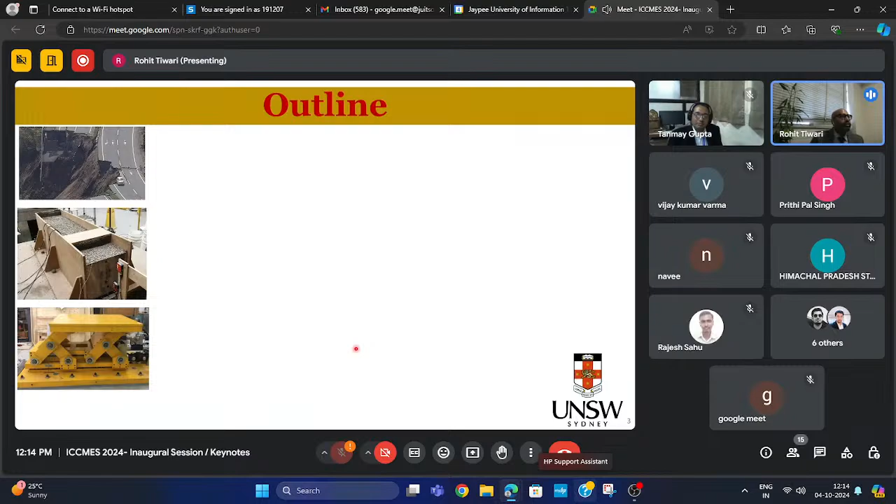So this is my outline. I will be talking a lot about geotechnical earthquake engineering, and especially earthquake loading in geotechnical structures - how the loading can be disastrous to different forms of geotechnical structures, how earthquakes act on geotechnical structures, and why the destruction or collapse of geotechnical structures happens.

Then we will move towards understanding the role of physical models in studying their behavior and comparing it with the prototype, which is actually a full scale model. So what's the importance of these physical models, and how capable are they of replicating the seismic performance or earthquake response behavior of a prototype or large scale geotechnical structure.

Then I will talk a lot about our new biaxial shaking table, which is our own design. There's a reason why I included this - to highlight how everyone can design their own equipment, and by doing this you can save almost 50 to 70% of the cost, which is really important in terms of money, and gives you an idea of your experimental setup and its capabilities rather than buying it from a commercial supplier.

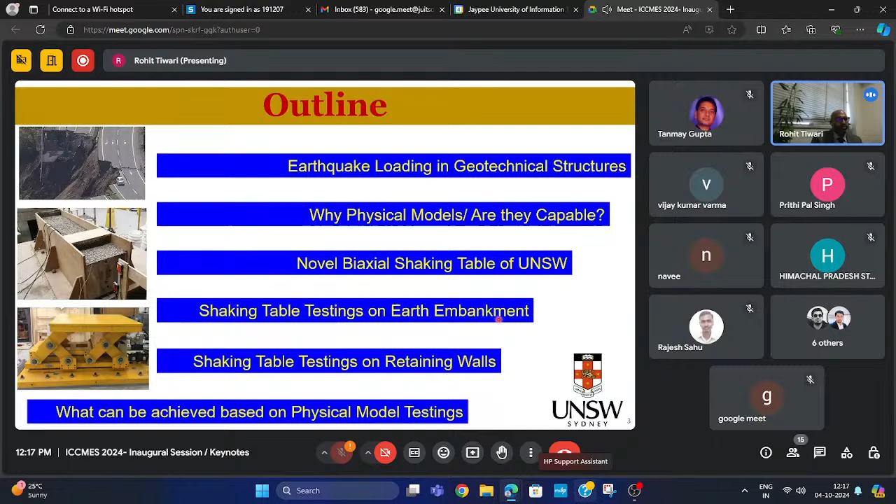I'll start by showing some interesting photographs of different retaining structures for the audience who are not very familiar with retaining structures or retaining walls. A retaining wall can look like this highway example: there's a filling, and in order to support it, you have to construct a retaining wall. So you have a stem, as in a cantilever retaining wall, or it can be a gravity retaining wall. There are different kinds of retaining walls available.

Then you fill it with a backfill. Generally it has to be a cohesionless backfill so that water is not retained inside the soil and can seep through. It also has better frictional properties, giving higher shear strength from the soil, which gives high stability to the retaining wall.

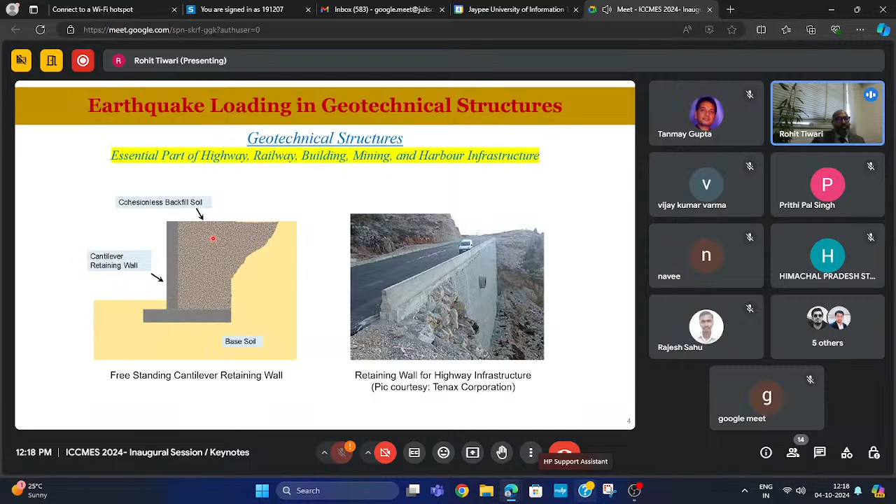Now this is another kind of retaining structure, a bridge abutment. Everyone has probably traveled over bridges — they're a major part of any modern infrastructure system. The bridge abutment is also a retaining structure, retaining the backfill behind it similar to before, but instead of just a retaining wall, it's also supporting a girder, so there will be a reaction from this side as well.

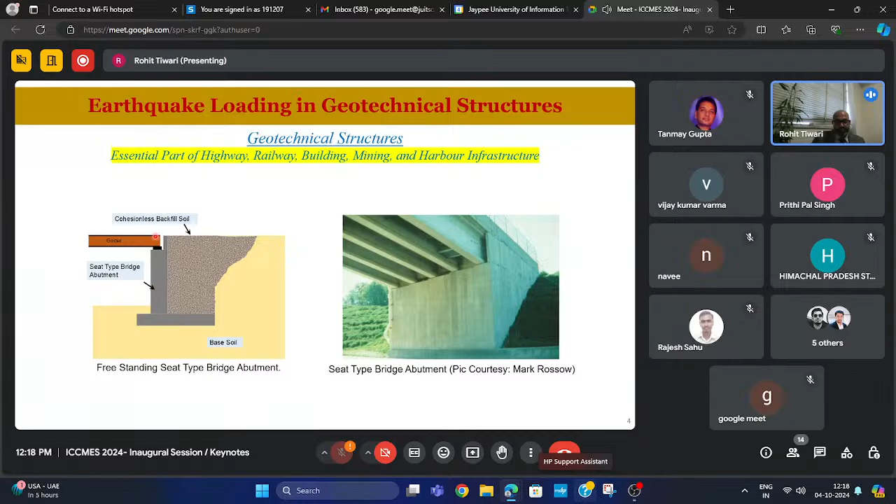This is another form of retaining structure — it can be a basement wall, a sheet pile wall supporting harbor structures, or a diaphragm wall. This is again a harbor infrastructure showing a quay wall. Because of the high water table and sand below, when constructed in a harbor medium, they are subjected to chances of liquefaction, where the ground loses almost all its strength and the soil behaves like a liquid.

In the 2001 earthquake in Bhuj, India, and in Japan, these walls were reported to get damaged because of liquefaction. Even in the Kobe earthquake in Japan, there was a report of damage to this kind of wall because of liquefaction.

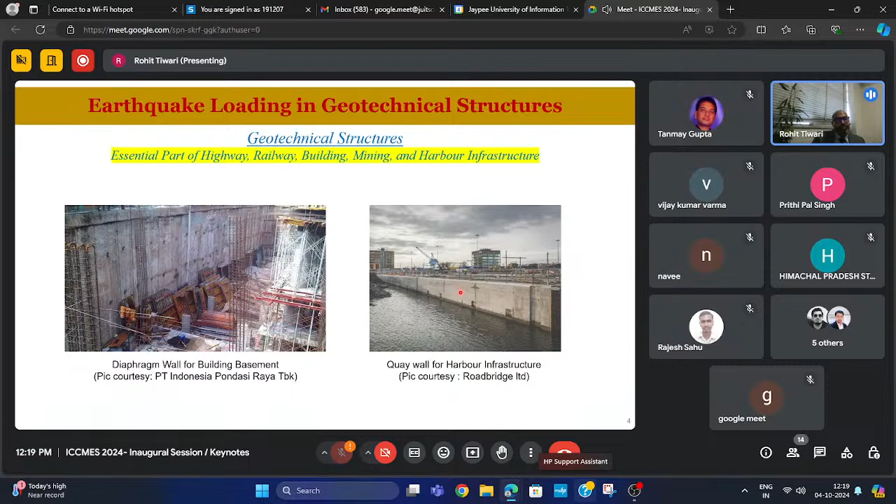This is another kind of retaining structure where you have a traditional retaining wall, but because of the low bearing capacity of the ground below it, you need to transfer all the load to the rock below. So this one is like a rock-socketed pile, with a backfill behind it, supporting a railway line. But it could be a roadway or anything else. I'm just trying to show you different applications of retaining structures.

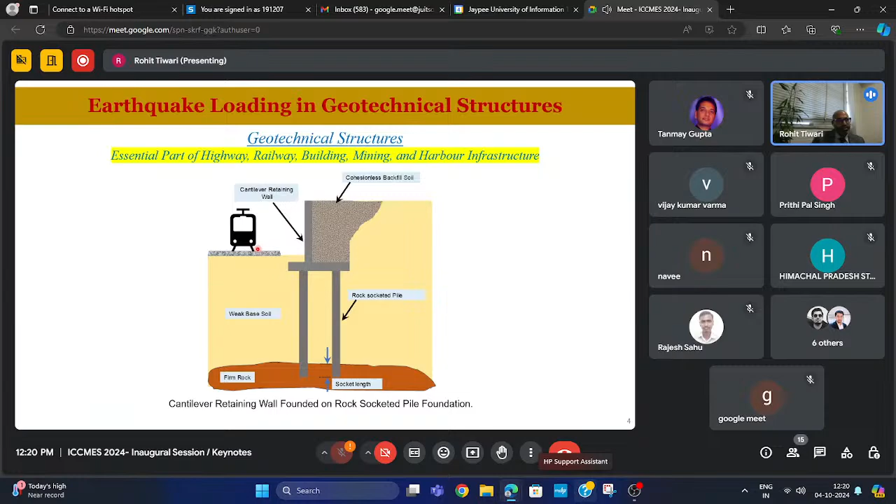I will also be talking about mining embankments or tailing dams. This is a photograph of a tailing dam. For people who are not familiar with what tailing dams are, I'll give some introduction.

When you do mining, you extract the ore from the mine — it's like rocks. You crush them, make a slurry or powder, mix it with water, and extract all the minerals — it could be gold, copper, iron — and take that mineral out. The leftover is in the form of a slurry, which you dump into a facility. We call this a tailing dam.

Over time, depending on whether you construct the dam by the upstream or downstream method, you get a very large embankment height, maybe from 30 meters to 100 meters, made of very loose and weak material. Because the water table is present there and they are subjected to earthquakes, there have already been some failures in the past where the tailing dam failed, causing a very significant environmental disaster as well as a disaster for human beings.

So if you see this photograph, this is not from India, but even in India, especially in the southern part, you have lots of tailing storage facilities. This is a disaster situation when you have a massive population living in the vicinity of the dam. In case of failure of this tailing dam, it won't be just a natural or environmental disaster, it will be a disaster to this population and to any river nearby because of the high contamination of minerals and heavy metals in that water. There are reports in Australia, Brazil, Chile, where tailing dam failures occurred in the past, resulting in loss of lives and long-term contamination of the land. So we have to make sure these facilities remain serviceable or don't collapse during a design level seismic event.

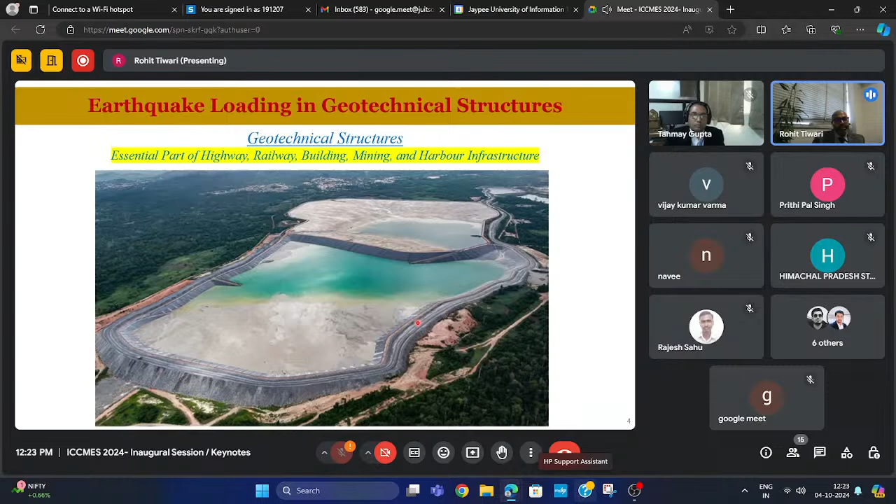So I will be showing you what we are doing here, in terms of shaking table tests on these loose materials, known as tailings.

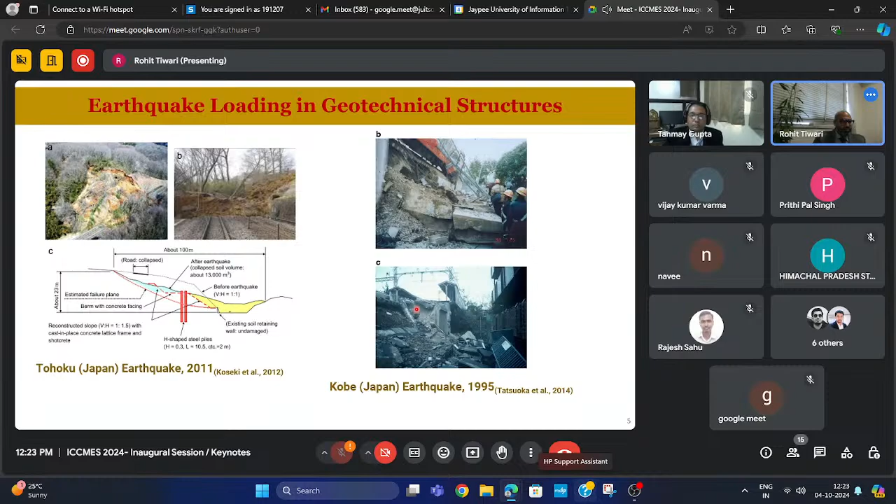This photograph was taken from the 2009 Italy earthquake, where you can see the failure of earth retaining structures. It's not a very long or large wall, but it still got failed.

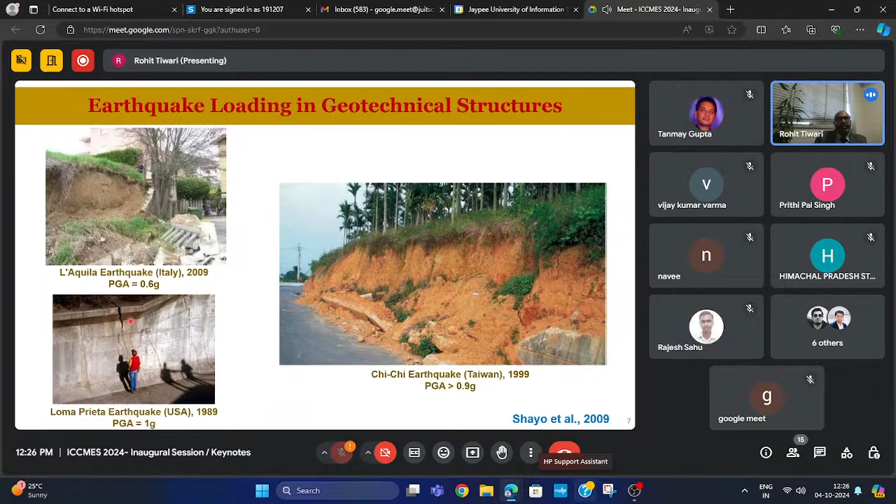There's another environmental disaster that occurred in Santa Barbara, California in 1925, and you can see the failure of a dam. This is before the earthquake, and this is after the earthquake.

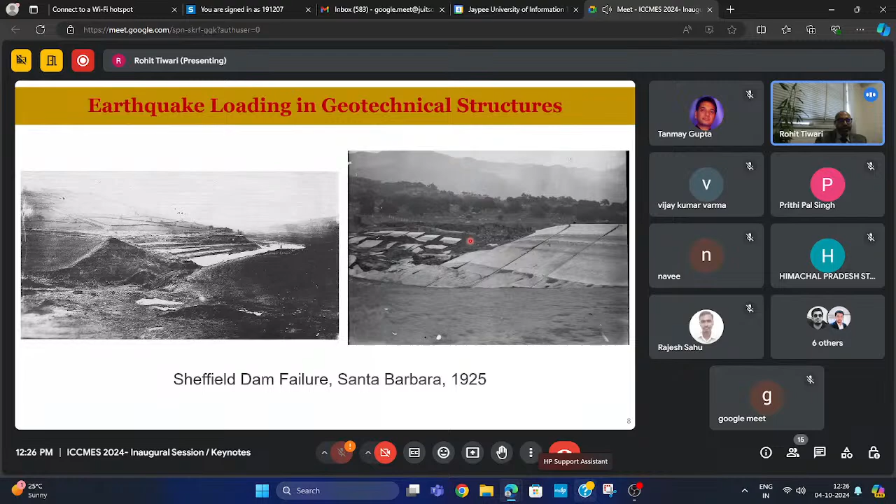Before moving forward into the structural aspects of the performance of earth structures when subjected to earthquake, I wanted to make you a little more familiar with how earthquake loading acts on a retaining wall. This is a freestanding wall which can slide on its base, having backfill soil behind it.

So when the earthquake comes, this wall may slide. Of course, not this much - this looks a little dramatic, just made more fancy. It can also rotate, so the failure can happen because of the rotation and displacement of the wall.

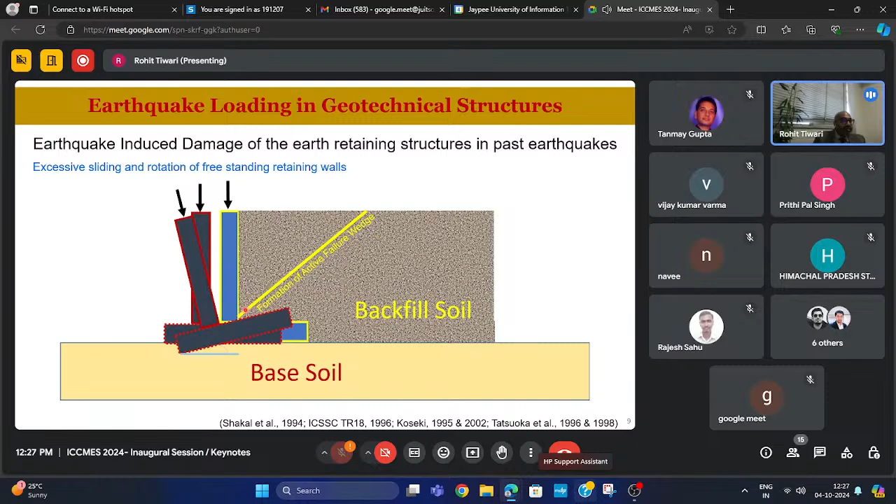Once the wall displaces a very small amount, it could be 0.2% of the height of the wall, there's formation of an active failure wedge behind the wall. If you're familiar with Rankine earth pressure theory from your undergrad, you might be able to correlate it.

This is the earth pressure acting on a retaining wall in a rest condition. There is no earthquake at this stage, and this is the weight of the wall and the weight of the soil. You design the wall for sliding and overturning using different earth pressure theories. This is the active failure wedge, and because of that you get the failure plane behind the wall.

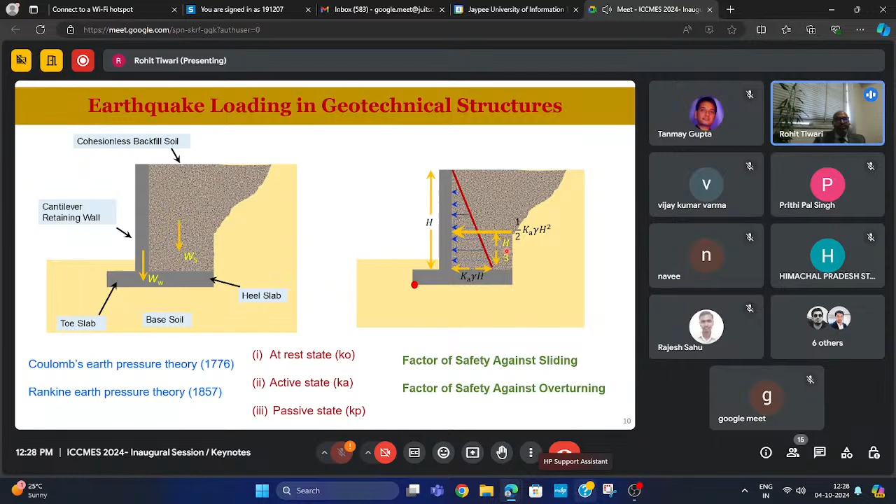The total earth pressure acting on this wall in active state is Ka gamma H, and the area of this triangle gives the force acting at a height of one-third of the complete wall height. Then you check the factor of safety of this wall against sliding and overturning. This is a very classical undergrad problem.

When the earthquake comes, this force changes. There will be an inertial component acting from the soil to the wall, along with rotation, sliding, and formation of the active failure plane behind the wall.

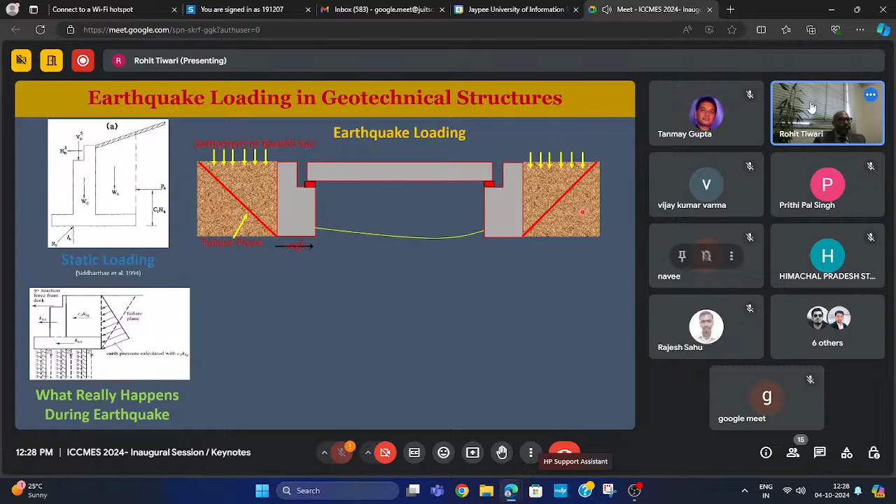In terms of earthquake, there are inertial forces acting along with vertical forces from the soil and the self-weight of the wall. Because of those inertial forces, the wall gets additional earth pressure from the backfill, resulting in displacement and rotation of the wall.

This photograph shows damage to a bridge abutment - the settlement of the soil and the rotation of the abutment. It not only creates structural damage to the bridge, it can also initiate excessive serviceability failure because of higher settlement of the approach road connecting the bridge to the highway. Once that happens, you can't use the bridge anymore.

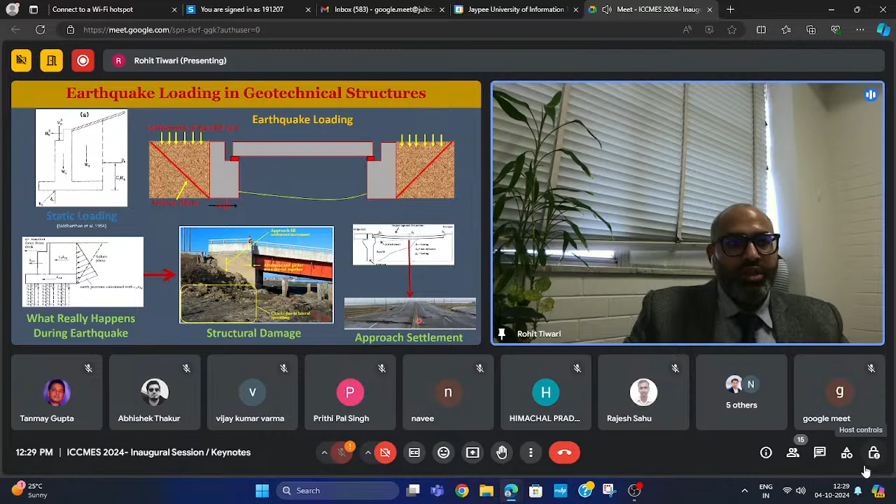As I discussed about the role of different forces in the retaining wall when subjected to earthquake, there is an inertial force acting in the lateral direction during an earthquake. If you remember from the previous slides, this is the total active earth pressure acting on the wall because of the Rankine active lateral earth pressure coefficient.

When the earthquake occurs, this earth pressure envelope basically gets enlarged. Instead of the static component of the lateral earth pressure coefficient in active state, you take a dynamic component of the lateral earth pressure in the seismic state.

If you follow the same approach, knowing the KAE value, the design is similar to the static case. You just need to find the total forces, which is the area of this triangle, and the theory says it will act at a height of h by 3, which might be controversial - I will discuss that.

The assumption says, similar to the static case, the dynamic earth pressure will also be linear, but that's not reality - it is non-linear, and I will show you that. These two researchers tried to modify the Coulomb earth pressure theory to come up with a similar arrangement, just the linear variation of the earth pressure, similar to what you get from the Rankine or Coulomb lateral earth pressure coefficient.

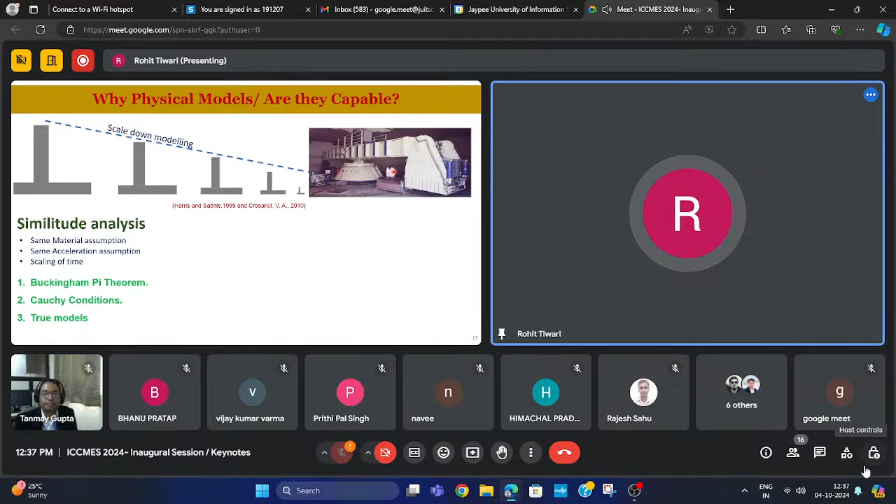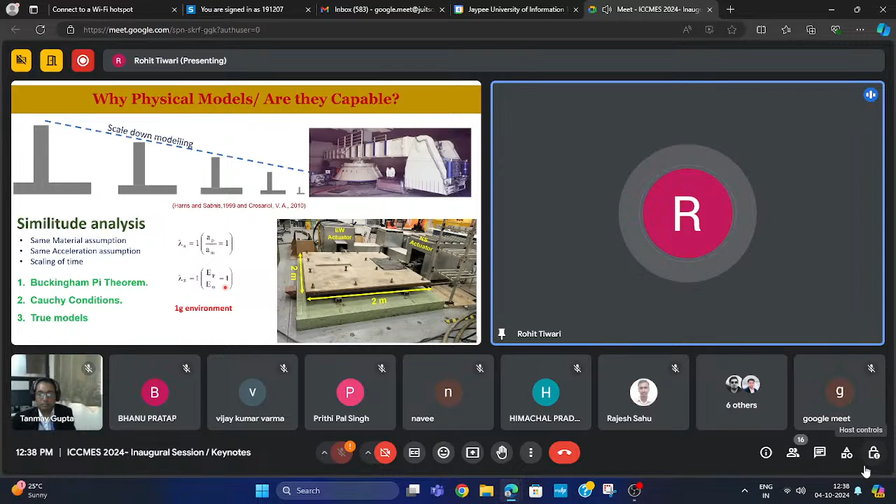So there is one alternative of this centrifuge testing. You can go for physical model testing in a 1G environment. In this environment you cannot change the gravity, so you have to be with the gravity, but you can play with the equations in these theorems. When you do them, you have to come up with some sacrifice. So you won't be able to get a very true response of the model, but you will get a really good understanding of the material behavior and the deformation of the scaled down model. Then you can use the same model for your numerical analysis to compare and learn how to do correct numerical modeling.

Now, if you can see here... I don't know, I think my camera is not working. I hope you can see me also. Now we can see you, sir. Okay, sorry, I just realized it's not working. Sorry for that. Now you can.

So if you talk about these physical models, the next question is, if you are using a physical model for any type of loading, static or dynamic, the million dollar question is: what's their capability? Are they able to replicate the realistic performance of the actual big model or not? That was my first learning in year 2016 when I started looking at this.

So if you follow this scale down simulation analysis, here's an example of a wall. The height of the wall is around 3.6 meters, and the thickness of the stem wall is 0.35 meters. If you do this scale down modeling and analysis, you use a computer model to create a scaled down version of this.

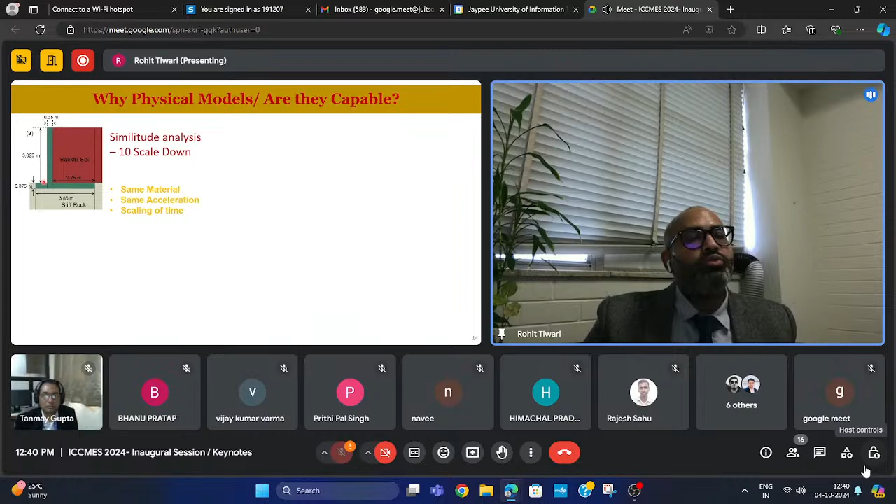To see whether this approach is working or not, you do the scale down model. This is a tiny model which represents the big model in computer software, and it looks something like this. It's a 10x scale down model, and all the dimensions are divided by 10. So this becomes 0.3625, now 0.035 meter.

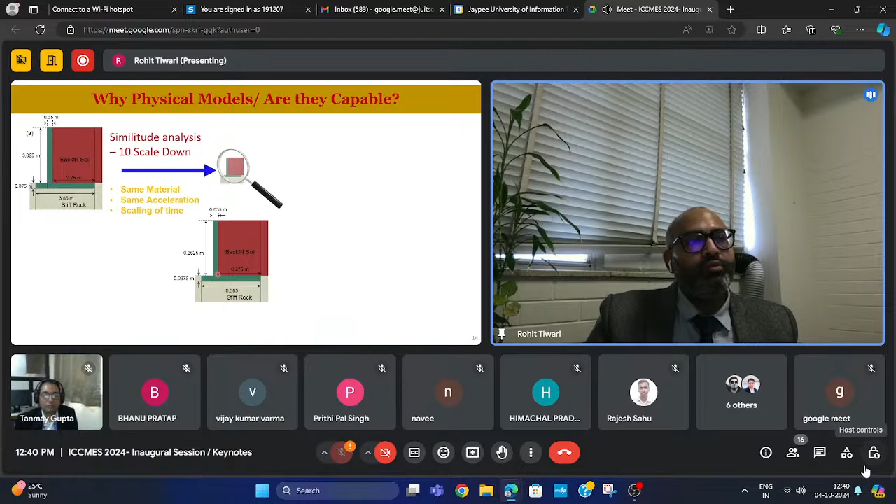You do the same thing for the properties of the materials, it's a concrete wall and backfill. Once you follow the scale down modeling and do the same material modeling based on the scaling laws, you get this behavior.

This is a relative displacement, meaning the displacement at the top minus the displacement at the base. Subtract the displacement at the base from the top and you get the relative displacement.

The result looks very promising. This is a very dynamic pulse, a real earthquake recorded in Iran, with a huge displacement of 250 millimeters. Both models, the full scale prototype model and the scaled model, give values that compare really well. This means the scale down models may be able to replicate the realistic performance of the prototype model.

But one thing I want to make clear: the scale down model will not show you this 30 millimeter displacement, instead it will show you 3 millimeter displacement. The same applies to the time scale, because in the scale down model you have to squeeze down everything, the time and the dimensions. Once you do that, you will get a response like this, but in a squeezed domain.

So the amplitude will be 3 millimeters somewhere, and this will scale with the square root of time. So then you have to enlarge it by multiplying with those same scaling relations and then superimpose the result. This is the final outcome, which looks good, and it means the scaled models are able to replicate the behavior of the prototype model, as long as you are scaling them properly and following all the similitude criteria.

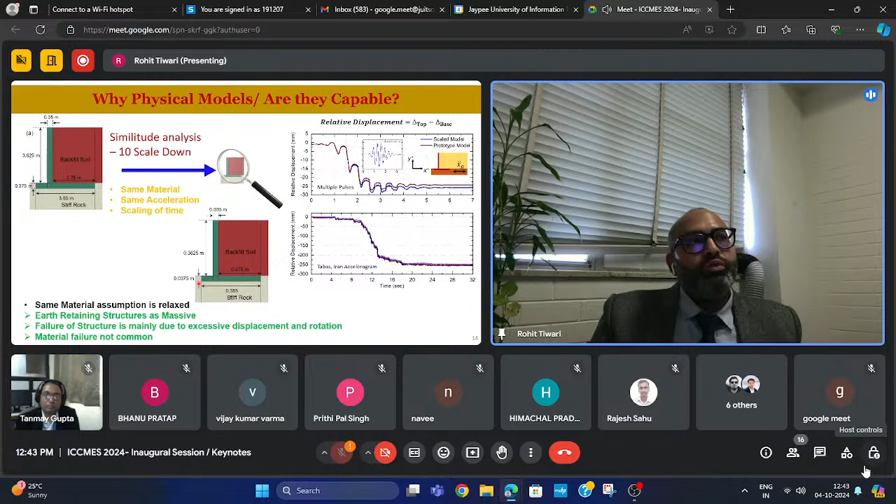So this is about the physical modeling. Now we will move to our novel biaxial shaking table, and some more results of the physical models will be coming in later slides.

So the next step is, now you have a physical model, you did the scaled-down modeling. Now how are you going to excite the model? You need a machine for it, because the accuracy of the models is completely dependent on how accurately you are analyzing their response. This is a shaking table which we designed in-house at UNSW under an ARC Future Fellowship Project. The table is a biaxial shaking table, meaning it can move in the horizontal and vertical direction simultaneously.

It is a novel design because it looks something like this - it has two arms, called the long scissor arm and the short scissor arm, and it follows a scissor mechanism. If you have used scissors, you can relate that mechanism to this arm, and I will show you while this table is in operation so you can correlate it well.

Two actuators are placed in it, and there is a rigid base - the red blocks are the upper base and lower base of the table - which move to achieve the horizontal and vertical displacement of the table. The table dimensions are 1.5 by 1.5 meters, but you can enlarge it by putting a metal sheet on top. The total payload capacity for this table is 3000 kg, but if you want more, you can just increase the diameter of the actuators and the size of the hydraulic oil supply.

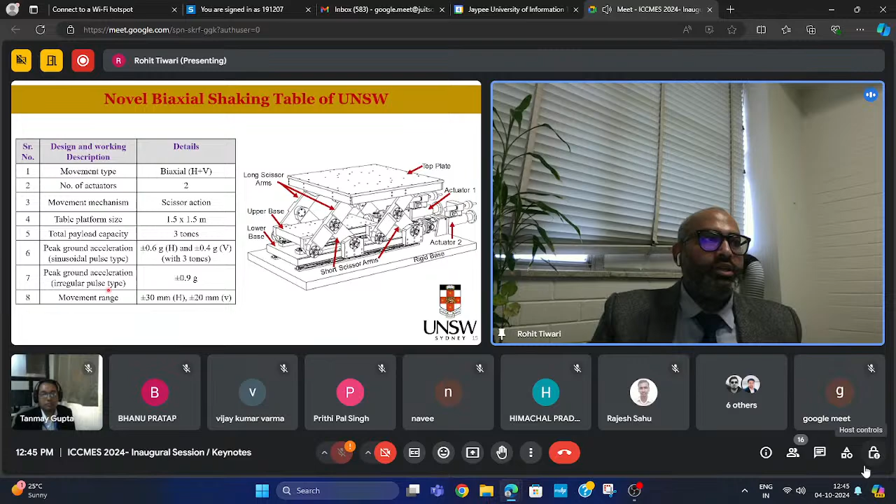Let's see how this table works. You can see the movement of the table - two actuators, this is the lower base, upper base, and these are the arms. They are trying to move the table in the horizontal direction, while the lower base and upper base try to move the table in the vertical direction.

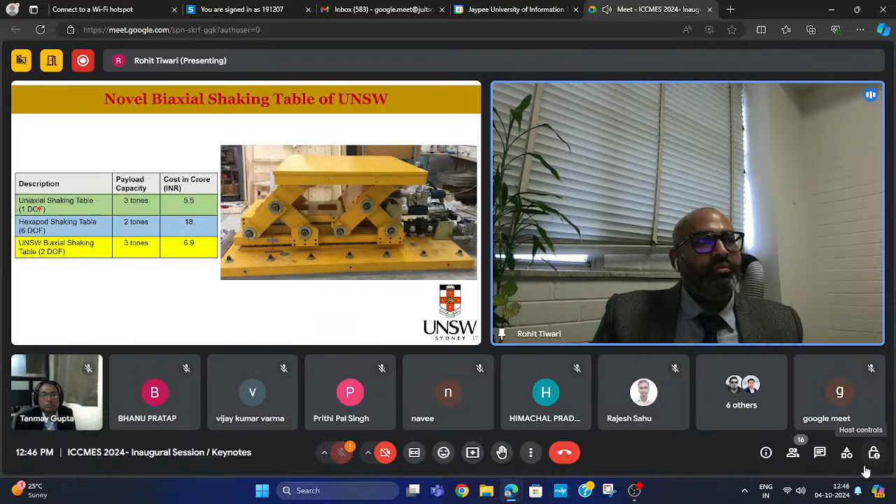So let's see the cost comparison. If you want to buy a table from suppliers, most of them European or American, a uniaxial shaking table with 3000 kg load capability, just 1 degree of freedom so it can only go horizontal, costs around 5.5 crore Indian rupees, which is around 850,000 Australian dollars. Now if you are going to buy a hexapod shaking table, a newly arrived table from American players with 2,000 kg capacity, the cost is around 18 crore Indian rupees. But this novel biaxial shaking table, we have achieved for around 7 crore Indian rupees.

Given that 10% of the table cost is for the manufacturer or the labor for the foundations, because it has to build upon a very strong floor, around 1.5 meters deep, since the machine foundations are quite high. This table can go up to, I think, 50 hertz, but if I take it to 20 hertz, the whole building shakes at UNSW. So I never went more than 20 hertz.

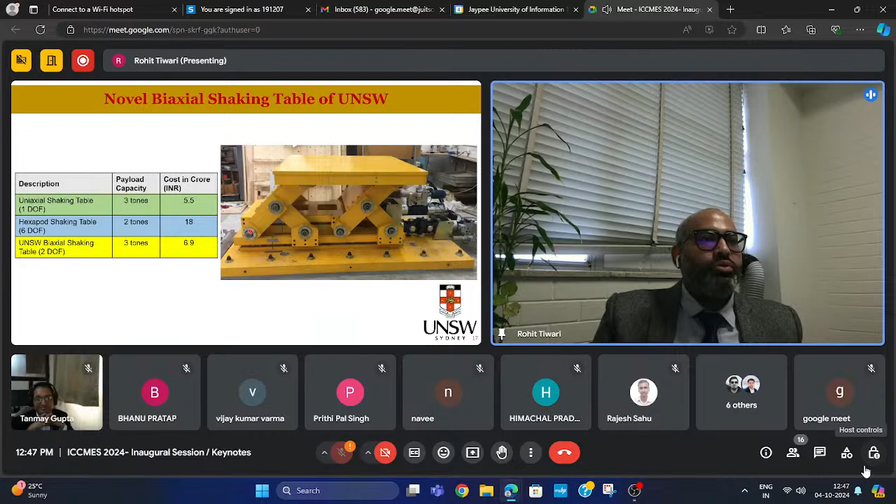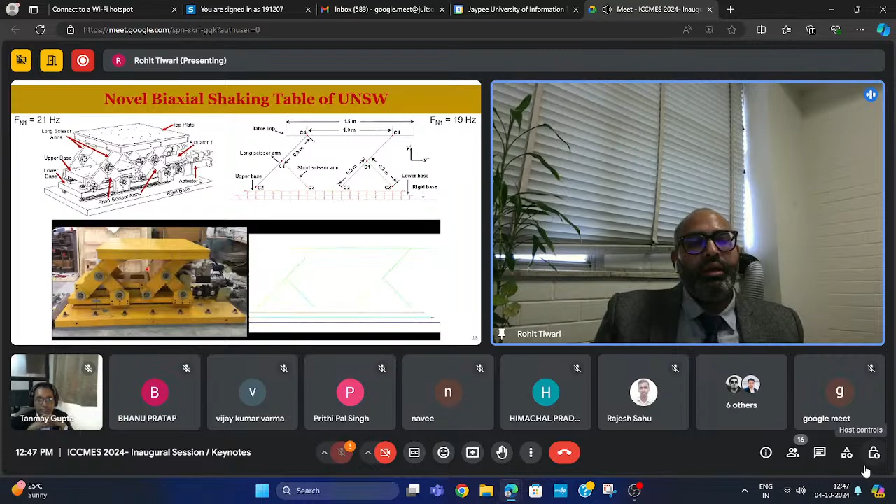So this is a biaxial movement simulation using a computer model, and this is the actual shaking table motion. This is the result of the finite element simulation compared with the shaking table experiment. They show quite good agreement, despite going for quite high frequencies, 10 hertz. With 2.5 hertz, it was showing a very good agreement.

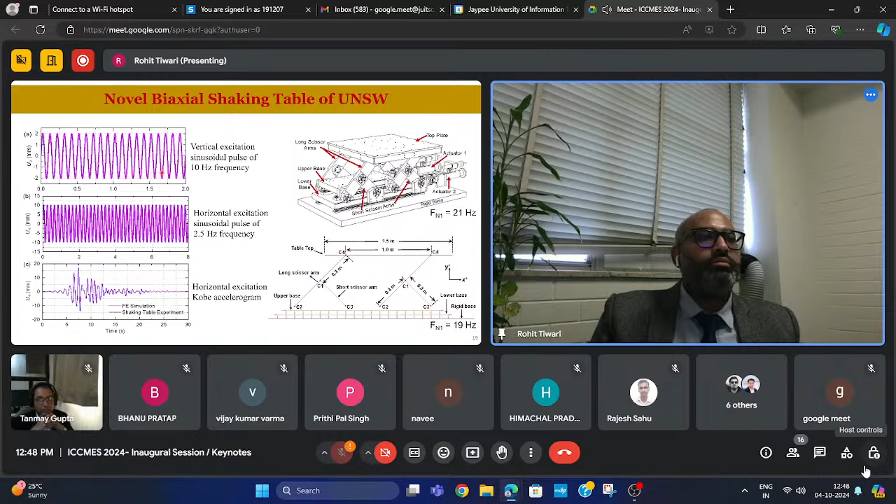Now, the next step: because it's a biaxial shaking table and uses a scissor mechanism, the problem is we are going to test the geotechnical model, and geotechnical models in the field are subjected to free field conditions. So how are you going to test that?

This is our own new design laminated shear stack, which has springs at the boundaries. When you put the model in it, right now we are testing on tailings, and these are the instruments. When you put the whole thing on top of the table, I'll show a video after this slide, you can simulate the free field response of the soil. The reflections from the boundaries will be limited, so you get a free field response at the center of the model.

In one test, it takes us around 2 to 3 weeks of preparation. Today I wasted 4 hours in the lab trying to get a few instruments working, no success. That's why it takes 2 to 3 weeks just to prepare for one test. It costs around $6,000 to $8,000 for one test. Once you come up with that, I'll show you how you can get really good research output based on this shaking table test.

This is the Center for Infrastructure Engineering and Safety, CIES, at UNSW New South Wales. I'll show you a typical test which we are doing using this table.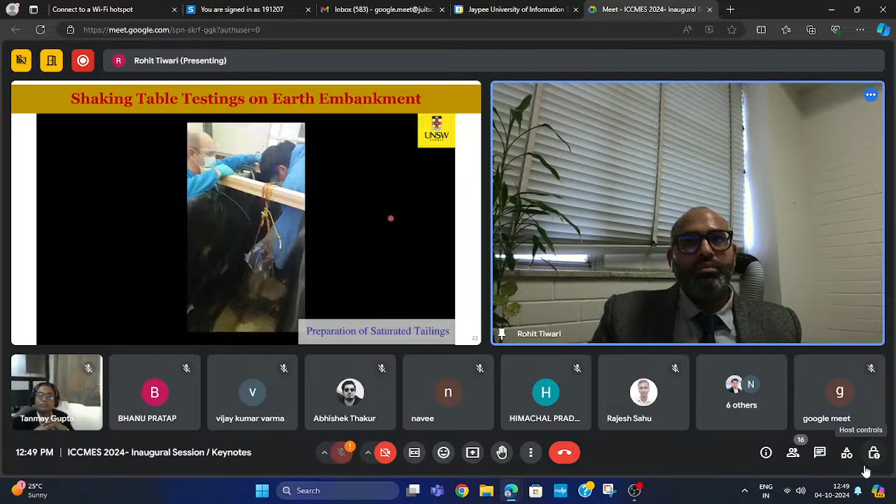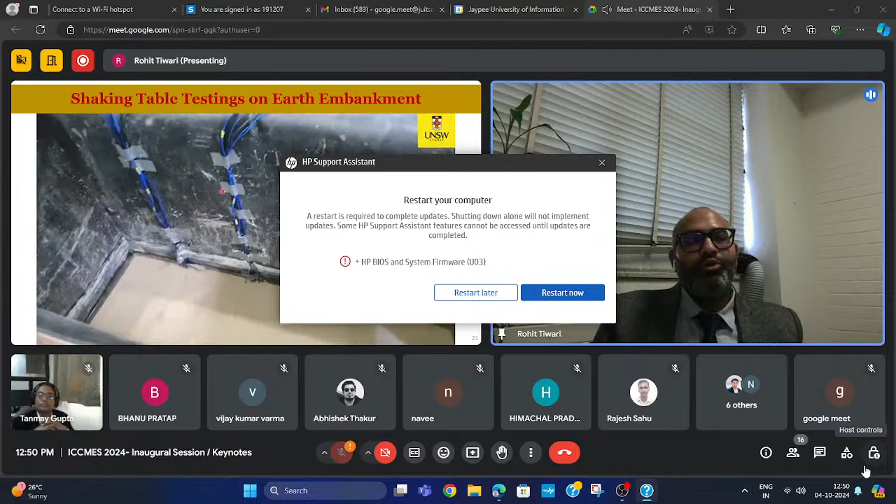On the instrumentation side, each shaking table test needs around 220 different wires to be accurately connected to the instruments. Otherwise, you'll miss a result if you miss that.

So this is the warming up. The hydraulics need to be warmed up to ensure they will be working properly throughout the test.

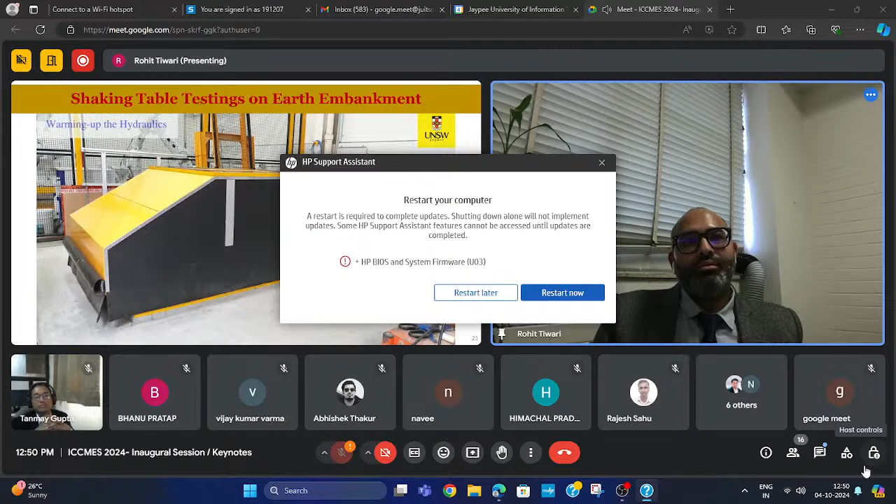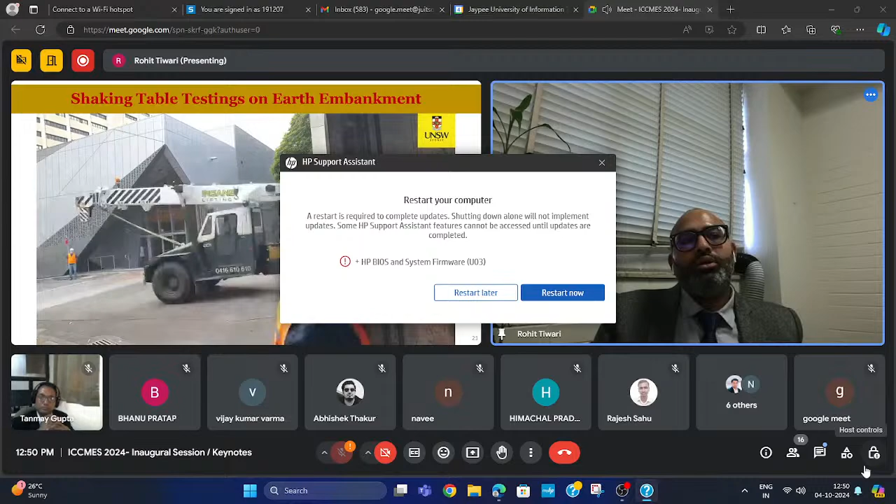Then you need a crane to lift up the model and put it on the table. But now we have our own crane in the lab, so we don't need to hire one. They're quite expensive in Australia, around 10,000 Indian rupees for 1 hour.

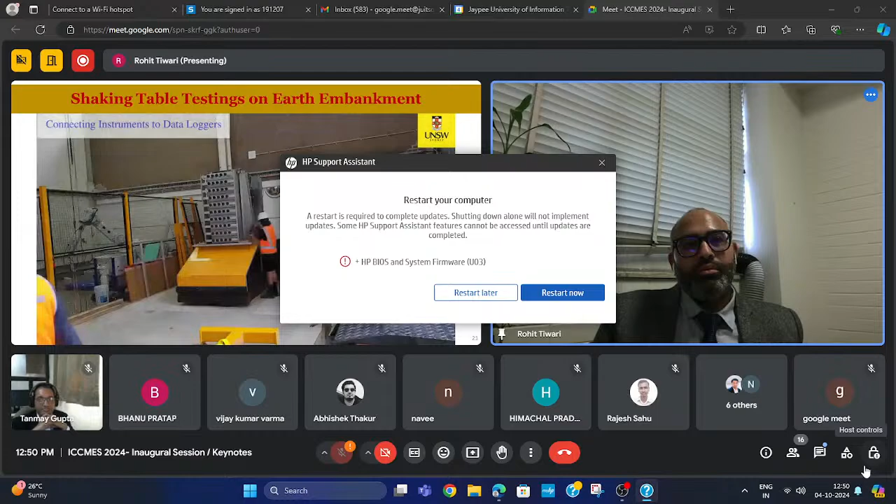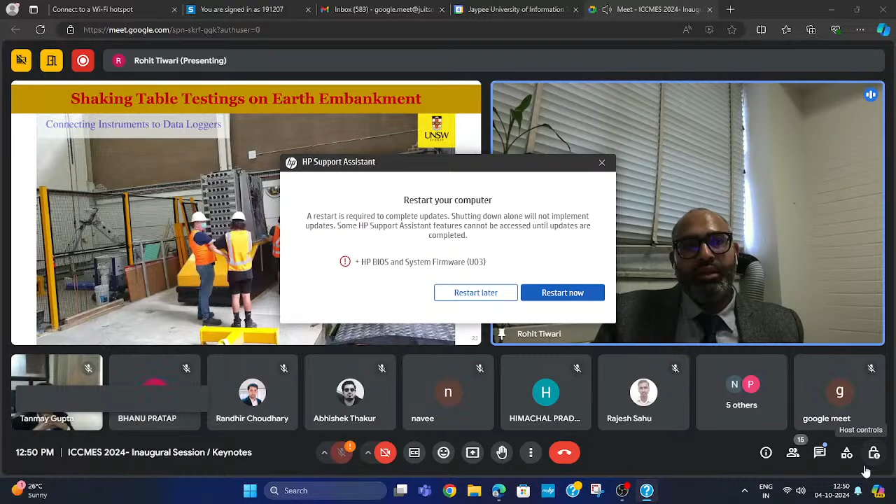So this is the team working on the experiments. All the wires need to be first untangled and connected to the different data loggers.

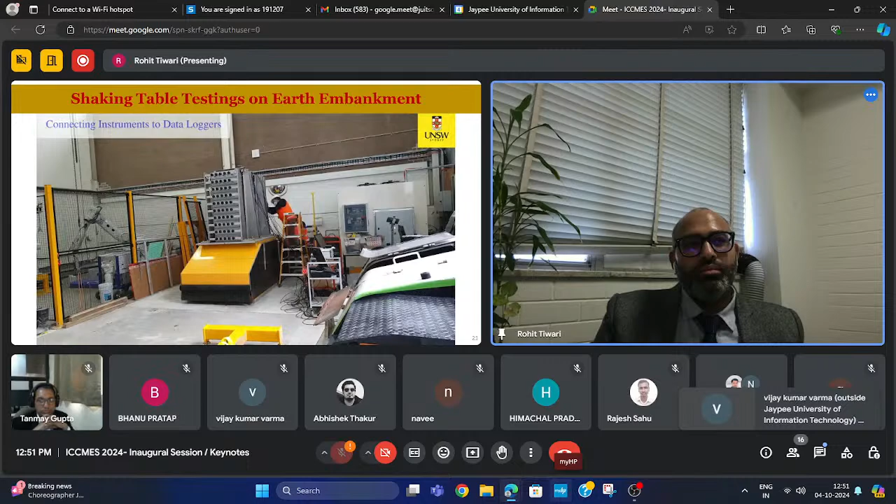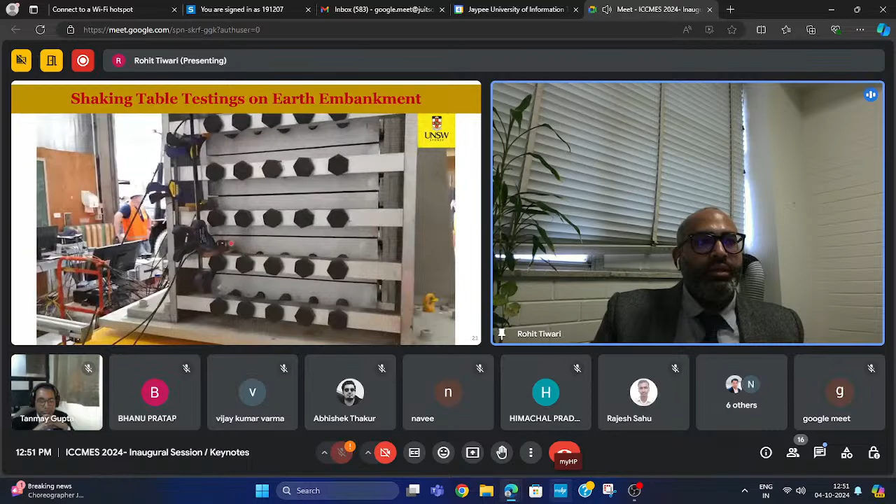Now we have already set up all the things, and the wires are connected. That's the main controller of the table. This is the acceleration logger. That's the logger for the piezometers, which we use to measure the pore water pressure inside the soil. And these are the lasers trying to read the displacement of different laminates.

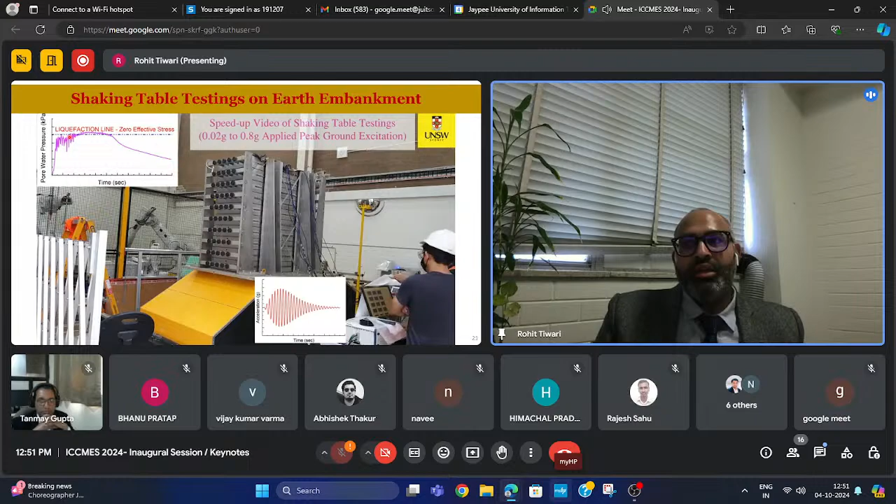Now I started a test. This is the input pulse, and you read the pore pressure. As soon as this line hits zero effective stress, it means liquefaction: the soil has already lost all its strength. And we keep increasing the excitation.

So this is 0.9 G, which is quite a lot. You can see the movement of the laminas.

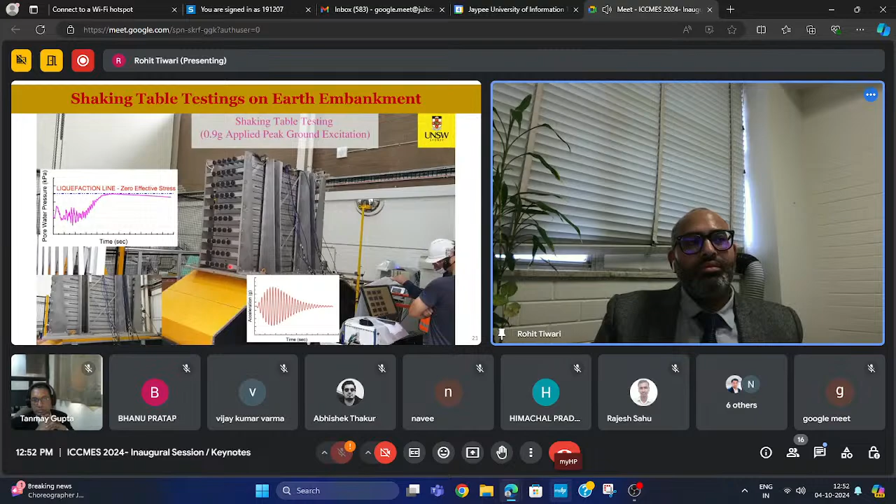So that's about the shake table test. I'll quickly try to move into the final slides because I think I'm extending the time limit.

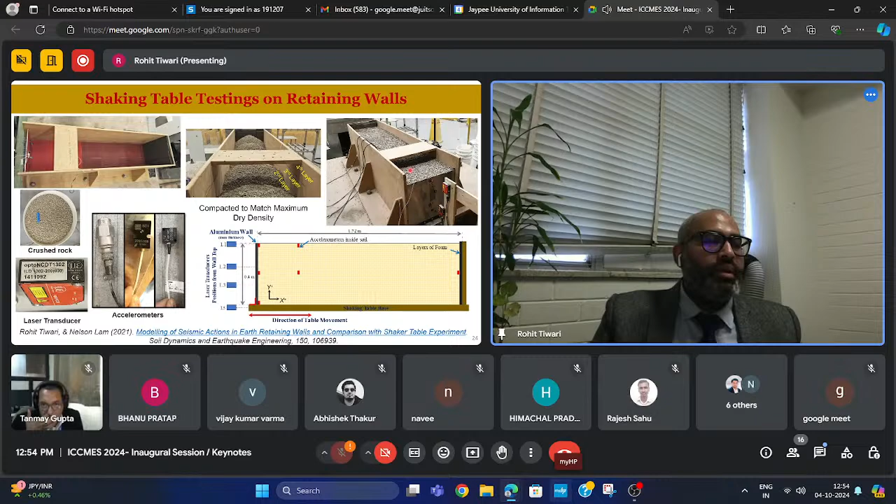These are different instruments, and then a crushed rock we used for different layers, dynamic compaction to make them flat behind the wall and achieve the maximum dry density of the soil. And then we did the excitation.

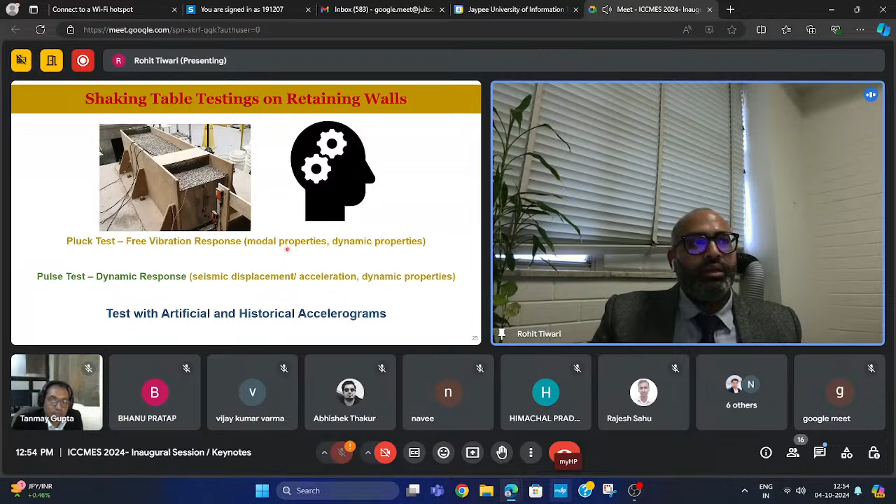The test has been conducted with different pulses, and I can show you that this one is a pluck test. Pluck tests are like a high velocity pulse. So you go from 0 to maximum displacement in 0.125 seconds using the shaker, and then leave the system to vibrate freely. This is the loading phase or forced vibration phase.

This is the free vibration phase. Once you leave the system, it will vibrate freely, and you capture the record here, acceleration or displacement of the wall or acceleration in the soil. And then you do the frequency domain analysis on it to get the natural frequencies of the system.

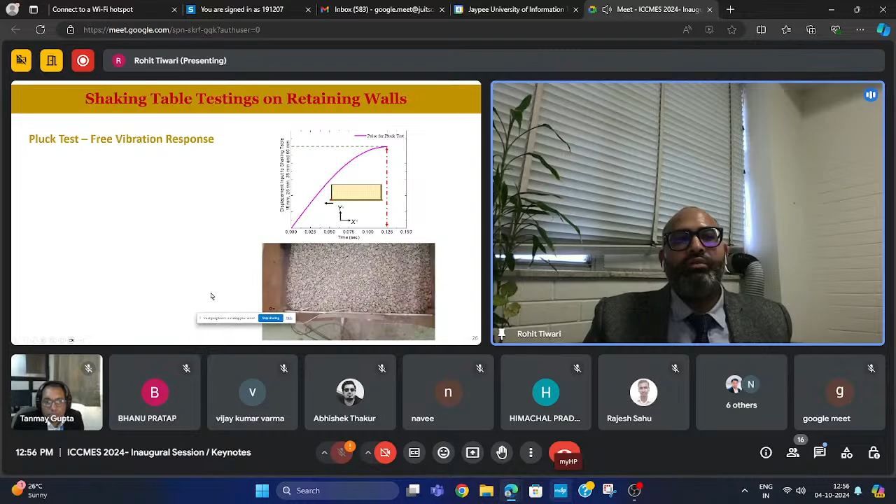So that's the video I wanted to share, which made the problem. This is a high-speed camera capturing the movement of the wall with a high-speed pulse. This is all the forced vibration phase. You can see the deformation of the wall and the soil. And then we let the system settle down and record the free vibration of the system.

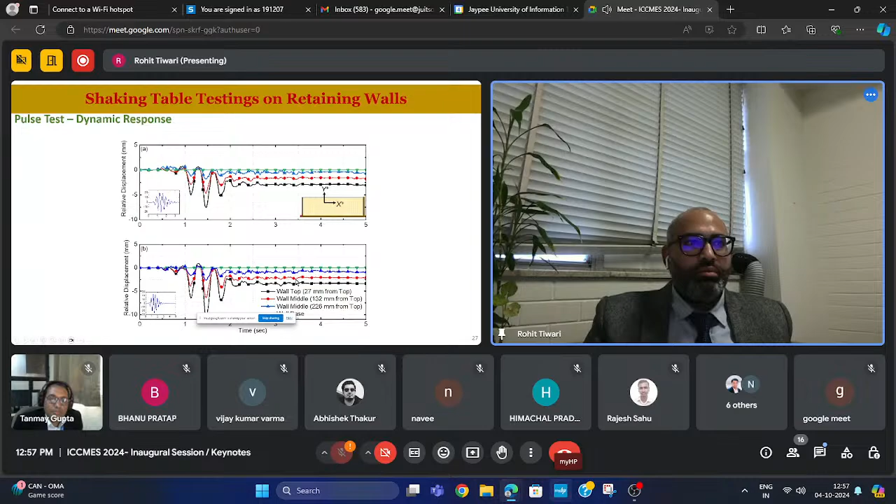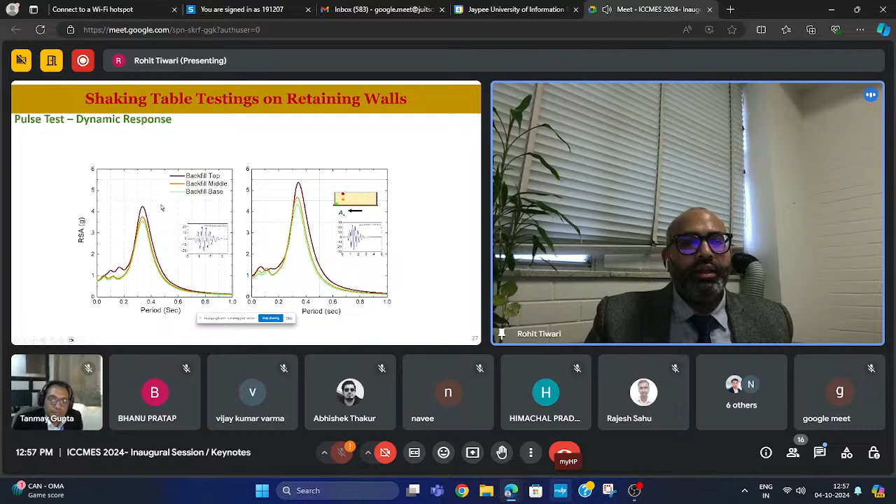I will be just showing you some other results, which is estimation of the shear wave velocity. So if you know the arrival time of the input wave at the base of the model, and you know the arrival time, or the peak of the wave, at the top, you just use this formula, which is distance divided by time, to get the velocity of the stress wave, the shear wave, in the soil.

And then this is for different maximum pulses. This is also in those papers which I just cited.

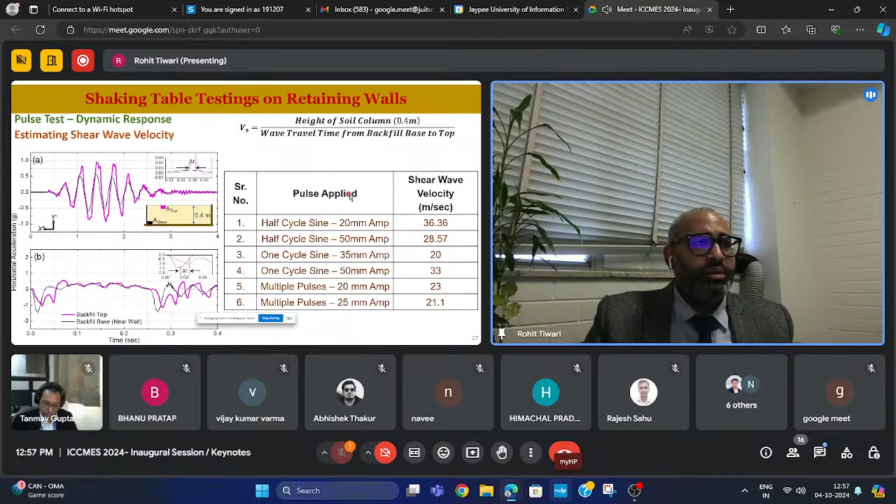Now this is the final two slides. I wanted to make more focus here. So what is the purpose of the research? Why did we do lots of testing, and what are we going to achieve out of it? Is it just the papers, or is it something, a new learning to the society?

And the answer relies on these two slides. First thing is, based on this physical model testing, it doesn't matter if they are in geotechnical engineering or in other areas.

We are trying to achieve an understanding between industry and academia on how to correctly model the earthquake response of retaining walls. In the paper we published in 2021, we give a complete guideline for industry on how to use a simple numerical model, whether you can extend it to simulate the post-yield behavior of the soil or not. You can do that, but it has to be calibrated accordingly. We give complete guidelines for industry and fellow academics on how to model the seismic behavior of walls or any geotechnical structures using very simple numerical models, very popular ones, but people often don't know their capability and how to use them properly. That got published in 2021.

Then again, as industrial output, we also gave very simplified equations, assuming that the wall is like a cantilever base-restrained wall, and you can estimate its earthquake response using very simplified formulations to get an assessment of its displacement during an earthquake. This is the major outcome industry is looking for. It will be helpful for anyone trying to design a retaining wall but who doesn't know how to find the displacement of the wall when subjected to earthquake load, or trying to model the finite element behavior of earth retaining structures and doesn't know how to do it properly. So this is the industry-focused outcome based on this physical model testing.

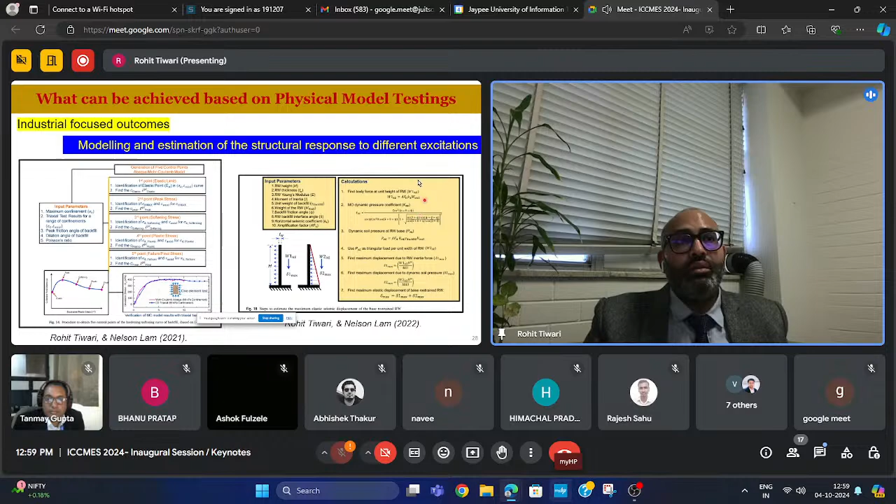The last one is the academic output based on this physical model testing, which I use most of the time in my teaching, and my other friends at UNSW also do the same, trying to teach and train students, both undergraduate and PhD, to get a good idea of geotechnical engineering. This is part of the subject I've been teaching for the last 4 years at UNSW.

Here's an example of how we use the learning from our physical model testing in training and teaching undergraduate or postgraduate students. We give students a slope which they have to stabilize using a retaining wall. They're given limited dimensions, limited geotechnical testing results such as CPT and SPT test results, and they have to come up with a combination of wall height, base dimension, and top dimension, and put it together to say, okay, these are the wall dimensions.

This is the peak ground acceleration given to them, and then we teach them using a freely available Abaqus student version—anyone can download it, it's limited to 1,000 nodes, it's free, and it will do the dynamic time history analysis for you. They then have to predict this using hand calculations, compare the results, and write a commentary. That will be the best achievement in training future engineers to understand how to design a retaining wall for loading.

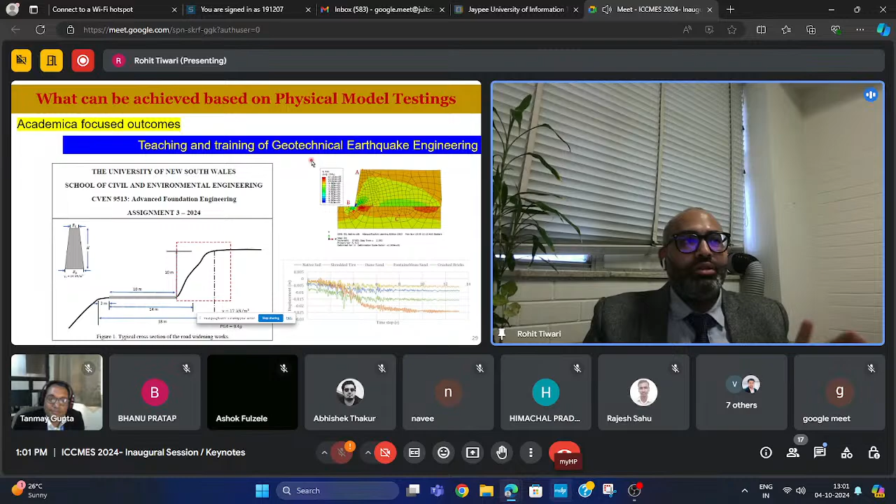So these are the closing remarks. Seismic inertial forces, as shown throughout our model testing and in those damaging images, can cause excessive deformation and damage to retaining walls. Physical models are useful to study the seismic behavior of any structures. Shaking table testing can be constructed in-house and will be a cost-effective initiative. The instrumentation could be very costly, but you have to plan it accordingly—what instruments are crucial, how many you need, and whether it suits your budget. That's all, thank you so much.

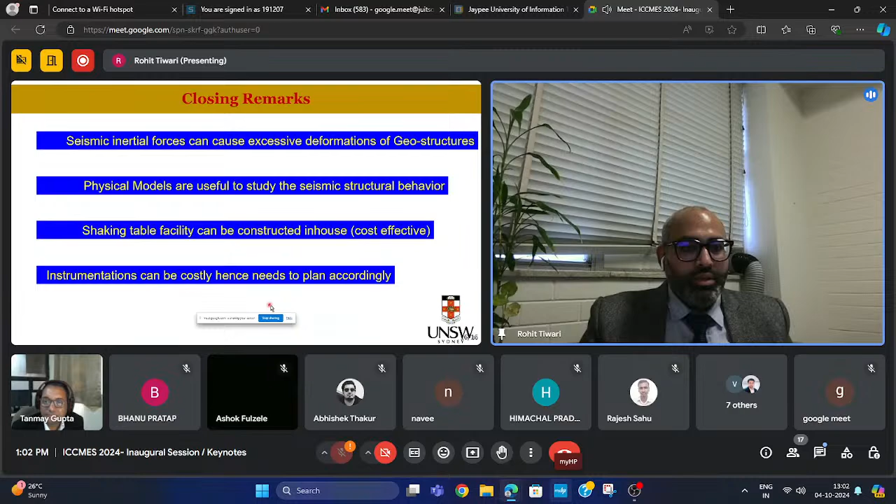One next question was there: what were the target results from the shake table tests? So the target results could be...

The target depends on what you are testing. For example, if this is an embankment, the target result we are trying to achieve is how much liquefaction is happening, what is the PGA, what is the timing of the liquefaction, and can we relate the timing of liquefaction to the timing of the PGA. We are writing a very groundbreaking paper at this stage.

It's finally a PhD project right now, and we're coming up with very good guidelines comparing the result of the shaking table experiment plus the CPT test, plus we have our own calibration chamber here, which we can use for saturated and unsaturated soil mechanics problems. And again, the outcome could vary.

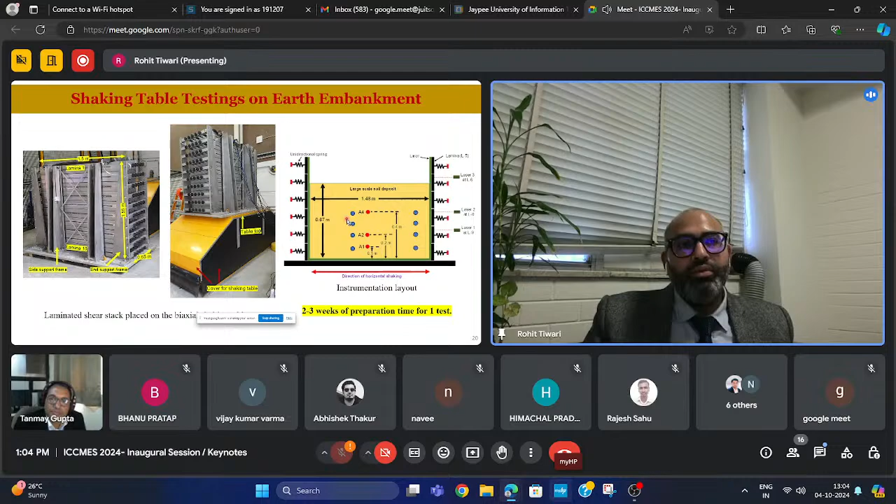One more question was there: were these results verified with theoretical calculations also? Yes. So with this paper, if you will see here, I'll show you this one.

Once you do the calculation, we also estimated the shear stress and shear strain using soil elastic shear theory. So validations are there, but of course the classical theories have their own assumptions, so they have their own limitations. We do validations, but it cannot be... for liquefaction, you don't have any validation for it.

It's just that you record the pore pressure inside the soil, and when it hits the effective stress line or zero effective stress, that's your liquefaction. You don't need any theory for that.

But what you need theory for is once you do the CPT, to check whether it correlates with the generally available guidelines for the relation between CPT and liquefaction or not. We are trying to even modify their theories based on our own observations. That's the beauty of experimental work, actually.